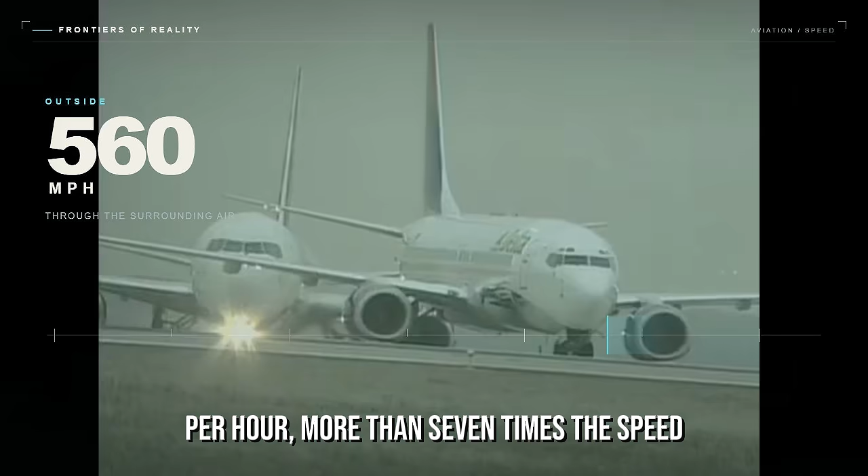But outside that window, the airplane may be crossing the sky at roughly 560 miles per hour, more than 7 times the speed of a car on the interstate. And here is the strange part. Airliners were already flying at nearly this speed more than half a century ago.

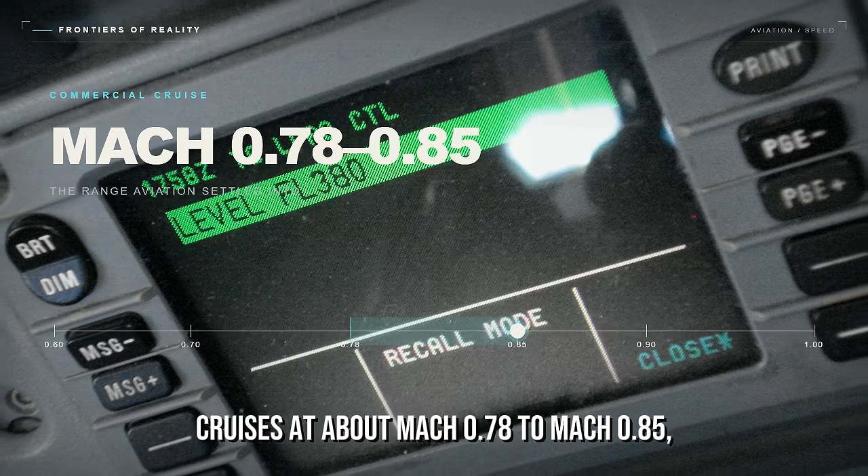Since then, engines have become more powerful. Wings are designed by supercomputers. Modern aircraft are built from advanced alloys and carbon fiber composites. We have sent machines beyond the solar system. Yet a passenger jet built today usually cruises at about Mach 0.78 to Mach 0.85, almost exactly where commercial aviation

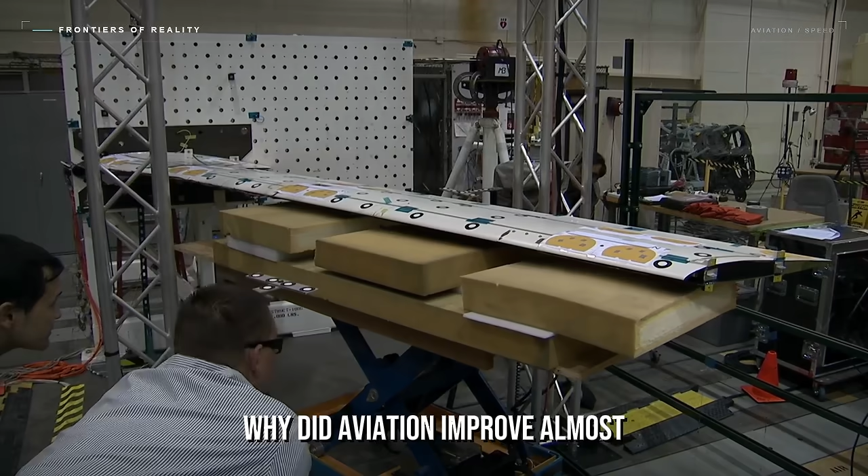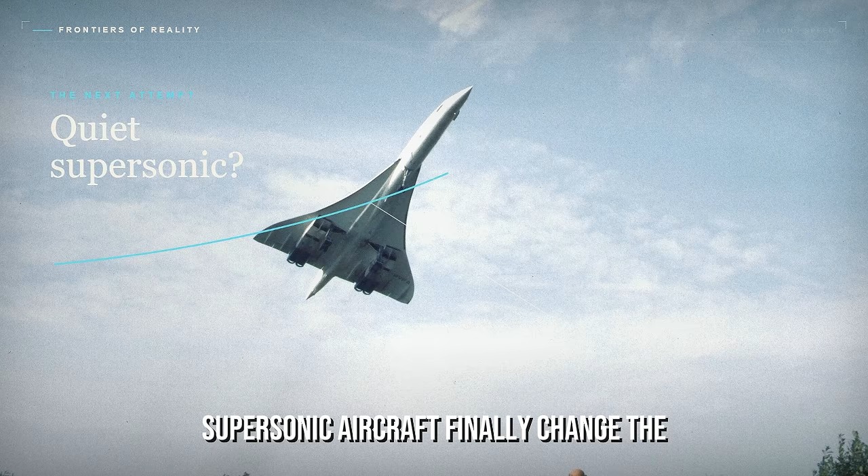settled decades ago. Why? Why did aviation improve almost everything except speed? Why does pushing an airliner only a little faster become so difficult, so expensive, and sometimes so dangerous? And could a new generation of quiet supersonic aircraft finally change the equation? The answer begins with an invisible transformation in the air itself.

At about 35,000 feet, a modern wide-body jet may cruise near Mach 0.85. Depending on temperature, that is roughly 560 to 570 miles per hour through the surrounding air. The number shown on a passenger's flight map may be higher or lower because that display usually shows ground speed, which includes the effect of the wind.

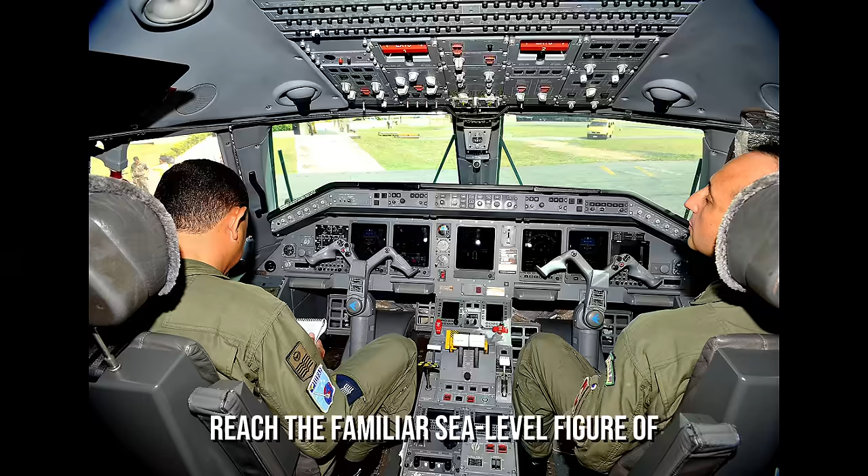For engineers, the more important number is Mach. Mach number compares the airplane's speed with the local speed of sound. And the speed of sound is not fixed. It changes with temperature. In the cold air near cruising altitude, sound travels more slowly than it does near the ground. That means an airliner does not have to reach the familiar sea level figure of roughly 760 miles per hour before parts of its airflow become supersonic.

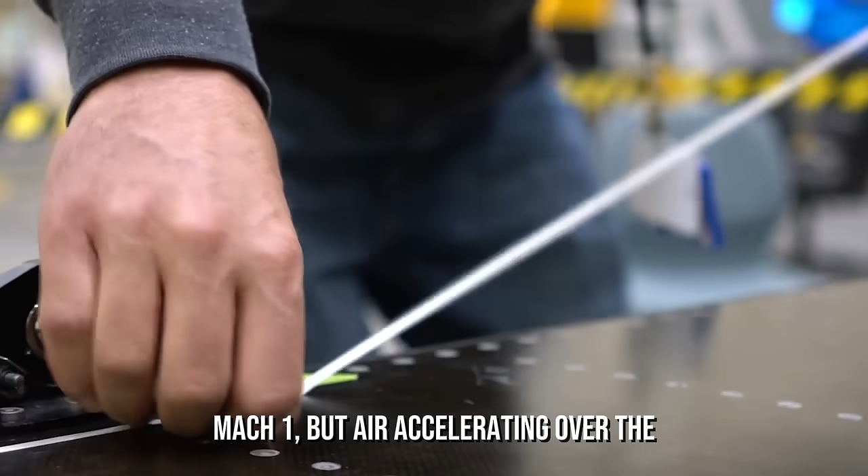The airplane itself may still be below Mach 1, but air accelerating over the curved upper surface of the wing can move faster than the airplane. At normal cruise, small regions of that flow may already reach supersonic speed. A short distance later, the flow has to slow down again. It cannot always do that smoothly.

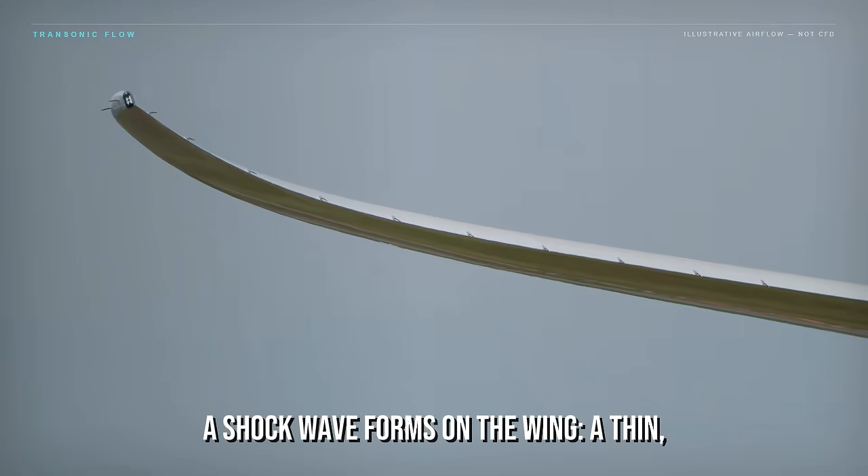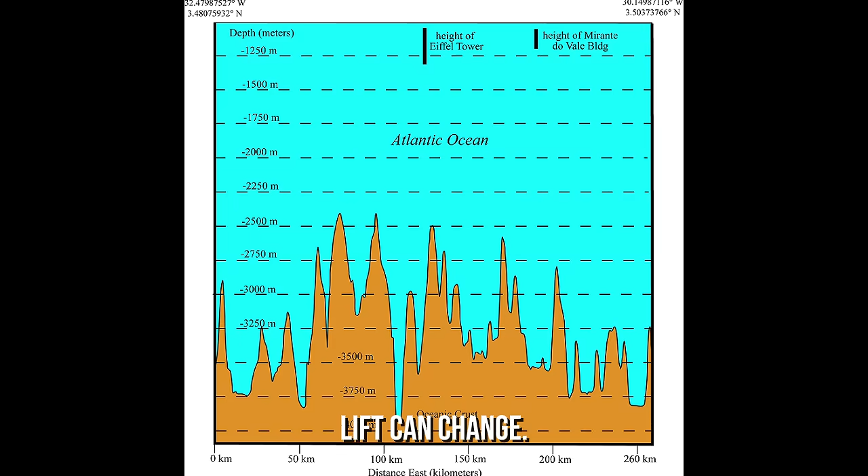A shock wave forms on the wing, a thin, abrupt jump in pressure, density, and temperature. Behind that shock, the airflow may separate from the surface. Drag rises. Lift can change. Buffeting may begin. Control surfaces can become less effective.

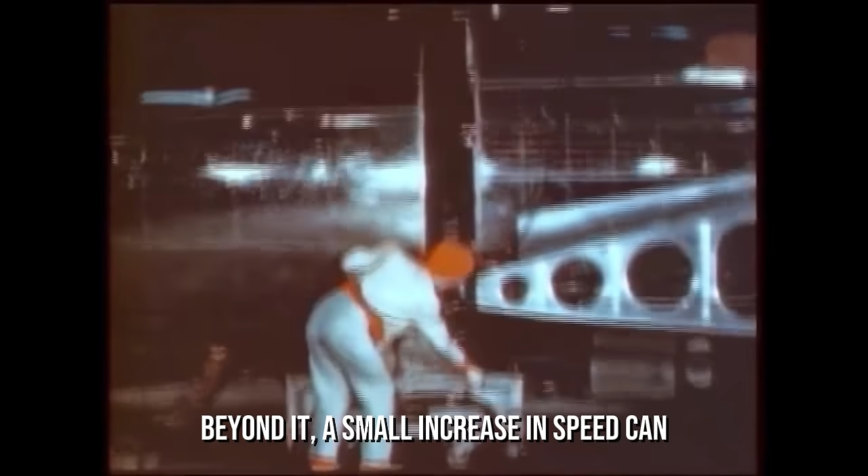This is the transonic regime, the complicated territory around the speed of sound. It is not a solid wall, and an airplane does not slam into it like concrete. But it does create an aerodynamic price that becomes steeper very quickly. Engineers call one important threshold the drag divergence Mach number. Beyond it, a small increase in speed can produce a disproportionate increase in drag.

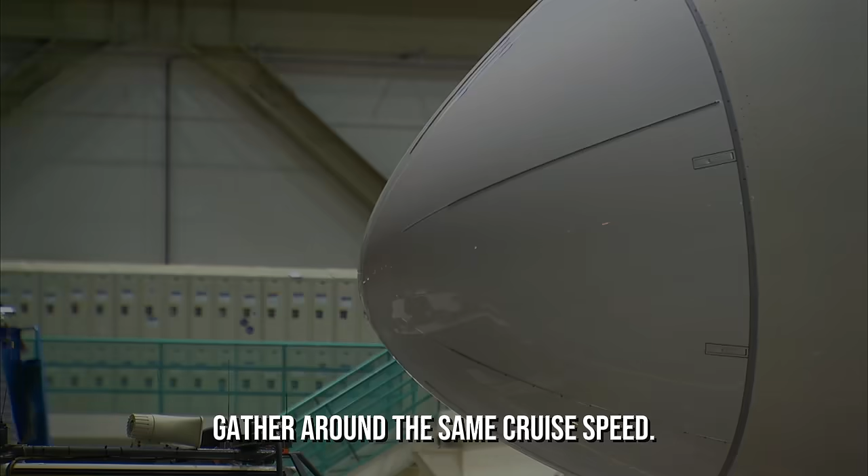To go only a little faster, the engines must deliver substantially more thrust and burn more fuel. This is the first reason passenger jets gather around the same cruise speed. They are designed to fly just below the point where the aerodynamic bill begins climbing sharply.

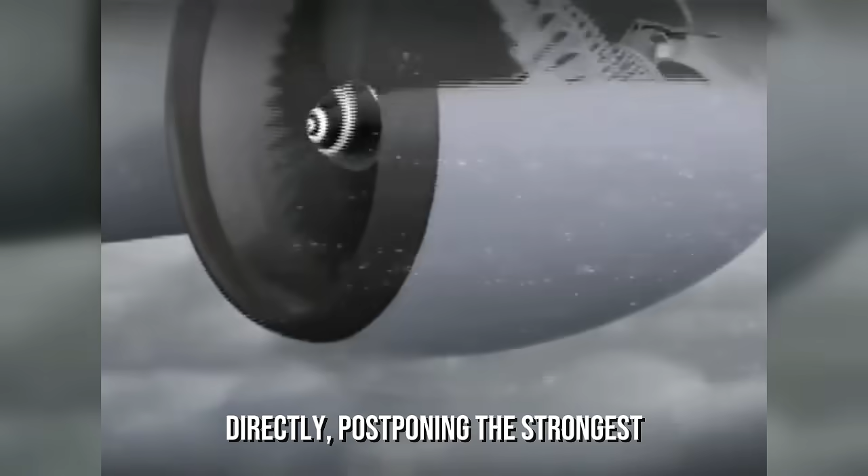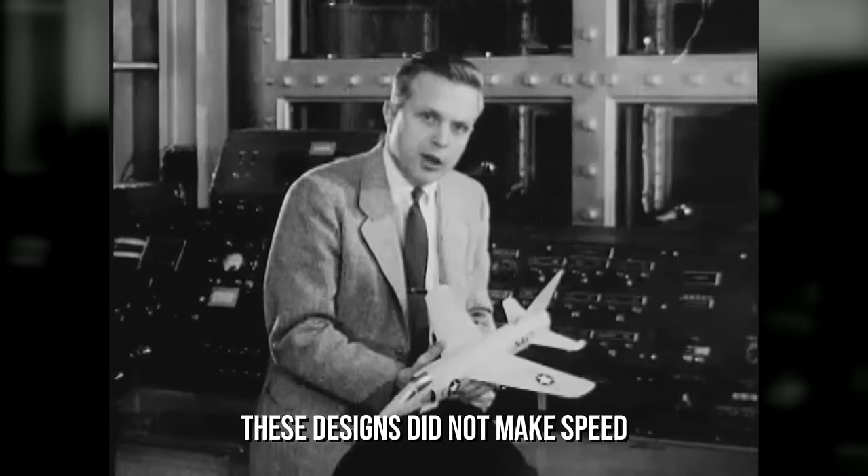Modern wings delay that bill with 2 major ideas. First, they sweep backward. A swept wing reduces the component of airflow that strikes its leading edge directly, postponing the strongest compressibility effects. Second, most modern airliners use supercritical airfoils. Their carefully flattened upper surfaces weaken the shock wave and help the aircraft cruise efficiently near Mach 0.8 or Mach 0.85.

These designs did not make speed irrelevant. They allowed airlines to spend the improvement on efficiency instead. NASA's supercritical wing research showed that manufacturers could either move closer to the sound barrier or remain at familiar speeds and save fuel. The market overwhelmingly chose fuel savings.

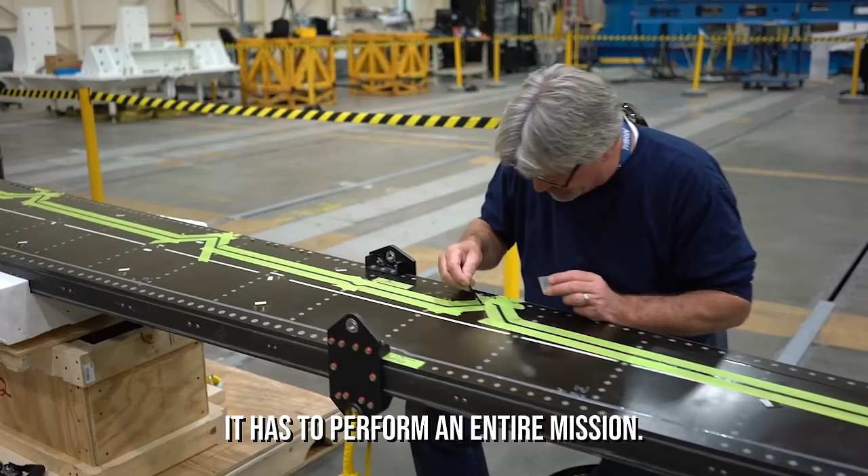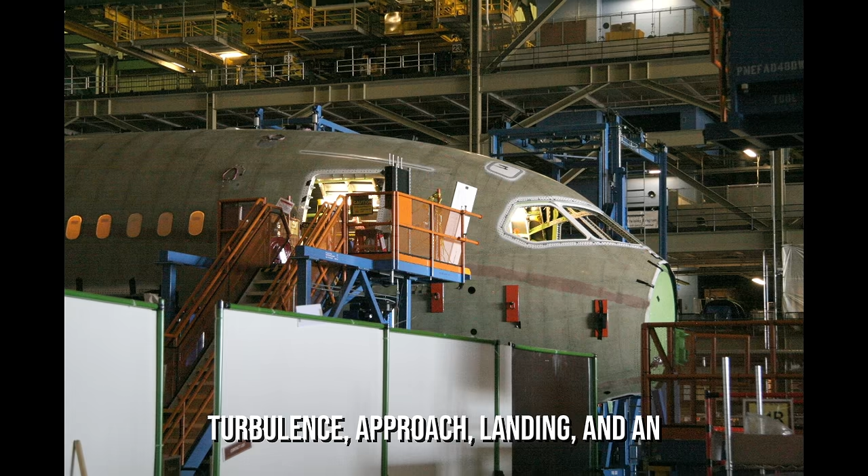That decision reveals something essential about an airliner. It is not designed for one spectacular moment at cruise. It has to perform an entire mission. The same wing that slices efficiently through thin air at 35,000 feet must also lift a fully loaded aircraft from a runway at less than 200 miles per hour. It must remain controllable during turbulence, approach, landing, and an engine failure. It must carry fuel, landing gear, control systems, and sometimes hundreds of passengers.

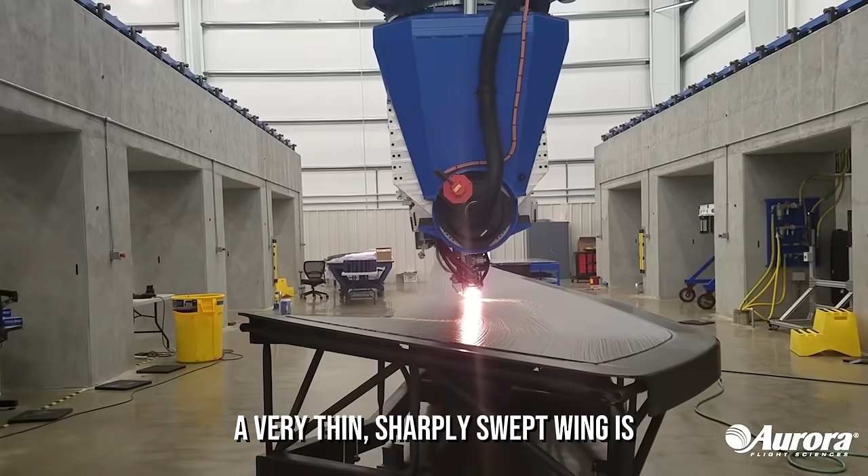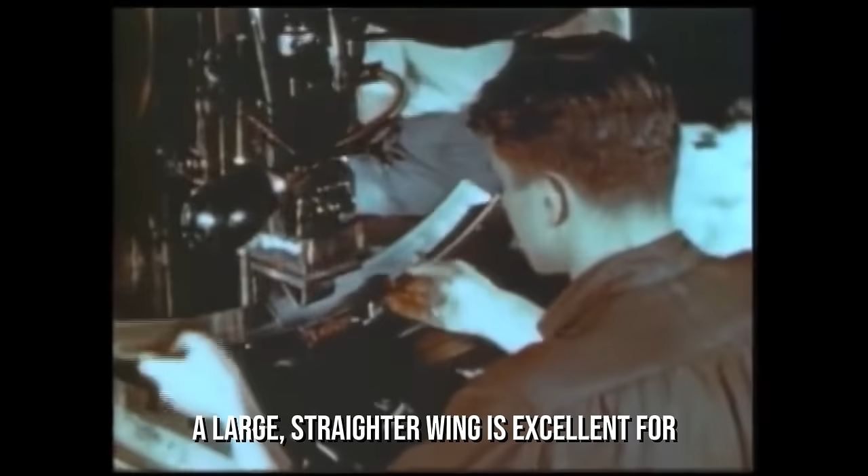A very thin, sharply swept wing is excellent for high speed, but it provides less room for fuel, creates structural challenges, and performs poorly at low speed unless engineers add more weight and complexity. A large, straighter wing is excellent for takeoff and landing, but it produces too much drag near the sound barrier. Every airliner is therefore a negotiated settlement between incompatible demands. Speed is only one vote.

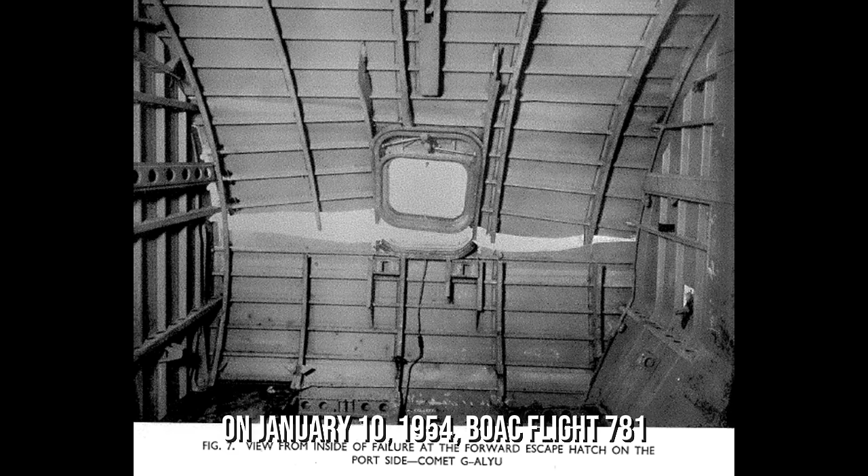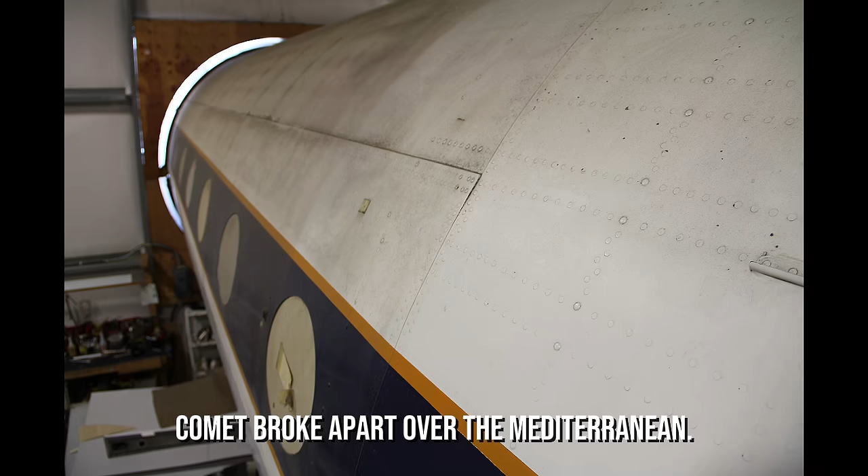The hidden cost of that settlement became visible during the first years of the jet age. On January 10, 1954, BOAC Flight 781 departed Rome for London. The aircraft was a de Havilland Comet, the world's first commercial jetliner. It flew higher, faster, and more quietly than the piston-powered aircraft it was replacing. About 20 minutes after takeoff, the Comet broke apart over the Mediterranean. All 35 people aboard were killed.

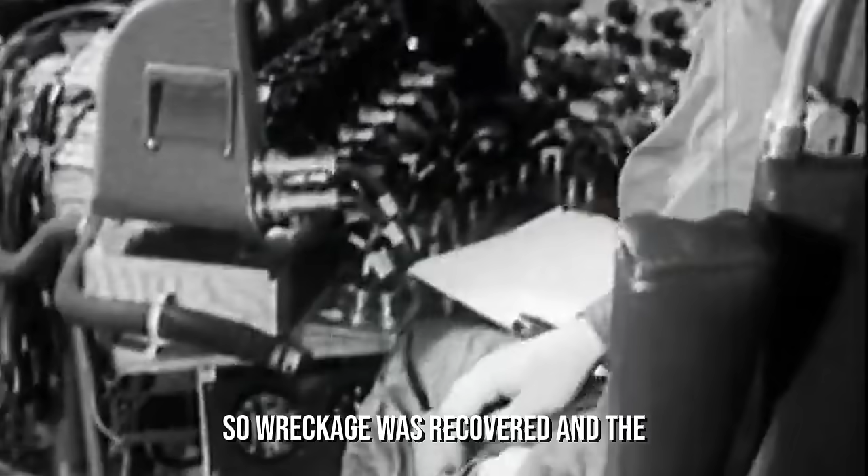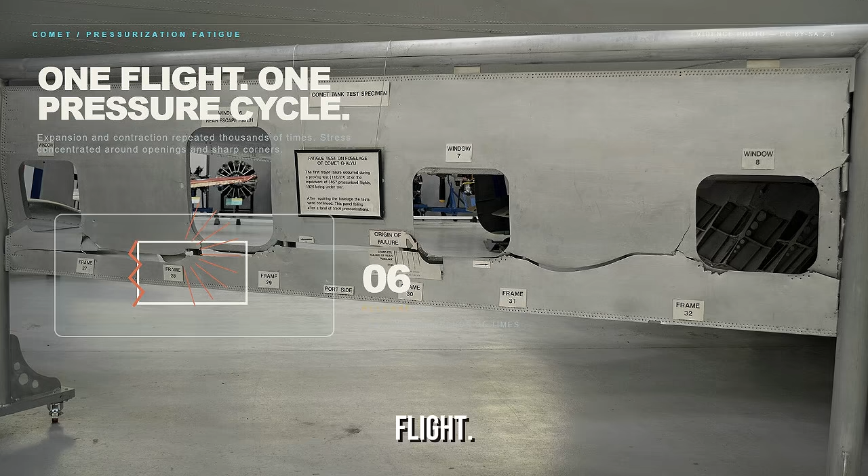Investigators faced a mystery. There was no intact aircraft to examine, so wreckage was recovered and the fuselage was reconstructed. Another Comet airframe was placed inside a huge water tank. By repeatedly pressurizing and depressurizing it, investigators recreated the stress of flight after flight. The result changed aircraft design.

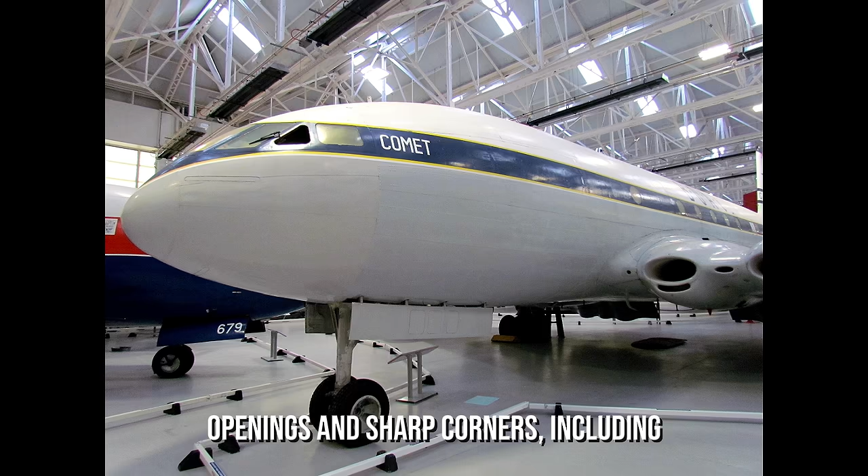The Comet's pressurized cabin expanded slightly at altitude and contracted again after landing. Repeating that cycle thousands of times produced metal fatigue. Stress became concentrated around openings and sharp corners, including window and antenna cutouts. Tiny cracks grew until the structure failed explosively.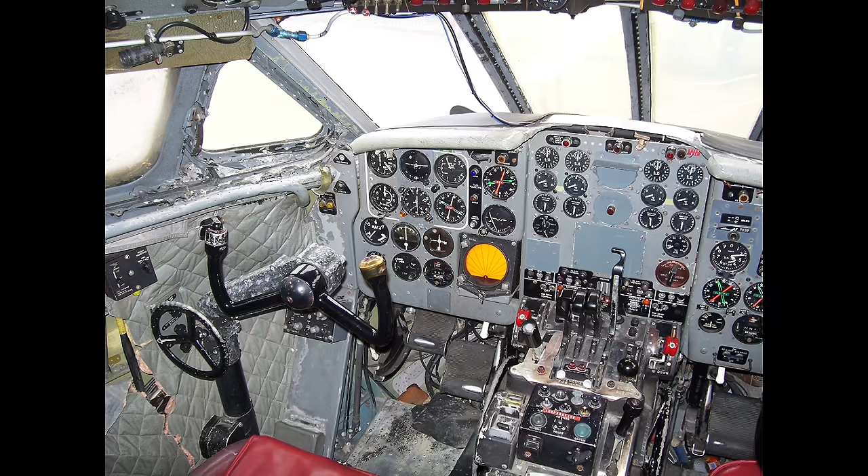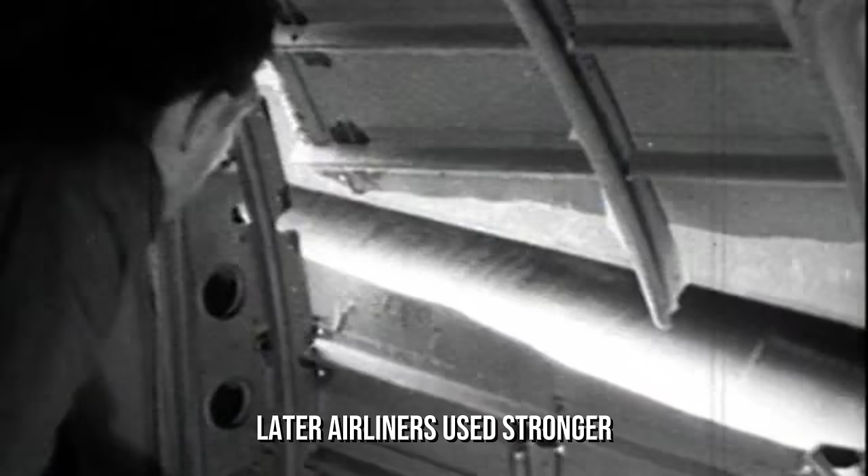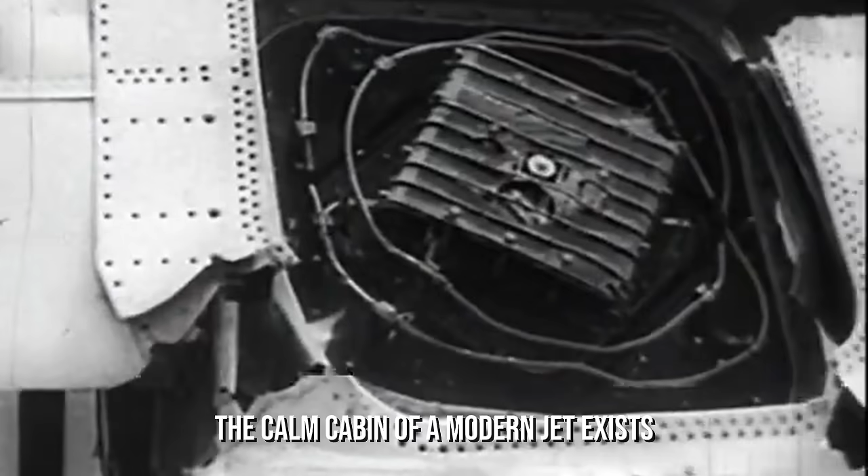The lesson was not that 35,000 feet, or 560 miles per hour, created a universal speed limit. The lesson was that high-altitude jet travel places repeated loads on a structure that can appear perfectly healthy until it suddenly is not. Later airliners used stronger construction, improved inspection methods, and openings with more rounded corners that distribute stress more smoothly. The calm cabin of a modern jet exists because engineers learned to control pressure cycles that passengers never feel.

But the higher an airplane climbs, the more another invisible margin begins to shrink. Thin air reduces drag, which is good for efficiency. It also reduces the lift available at any given true airspeed. To remain airborne, the airplane must move fast enough through that thin air. Fly too slowly, and the wing can stall.

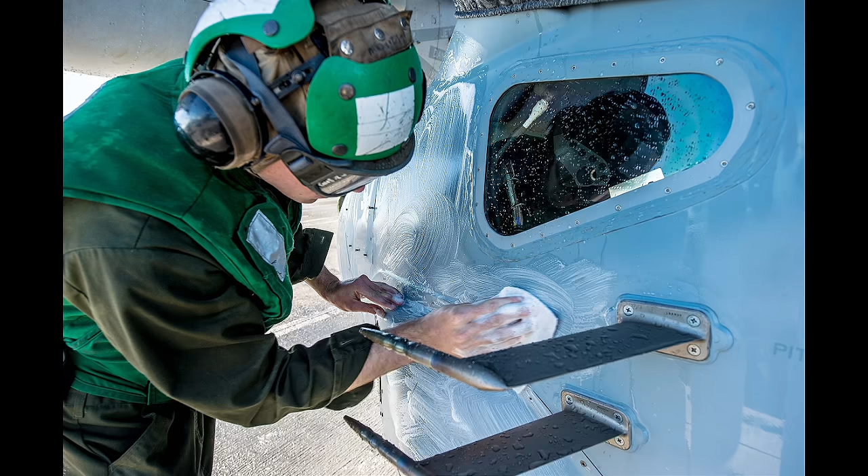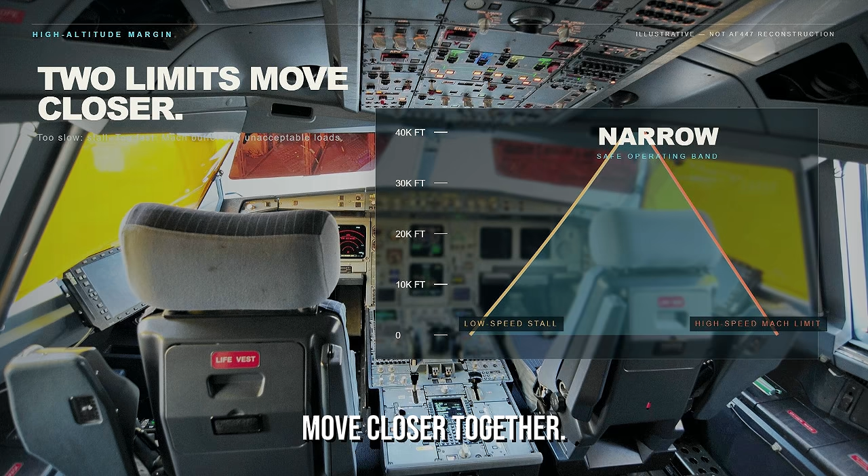At the same time, the aircraft must remain below its high-speed Mach limit, where shockwaves, buffet, or structural loads become unacceptable. At very high altitude, the low-speed boundary and the high-speed boundary can move closer together. Pilots historically called the extreme version of this narrowing coffin corner. Modern transport aircraft use carefully calculated flight envelopes, automatic warnings, and control laws to keep operations safely away from those boundaries.

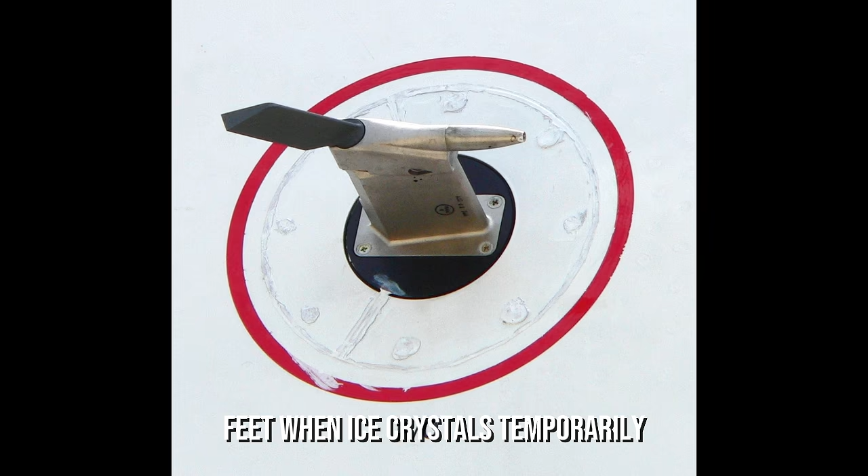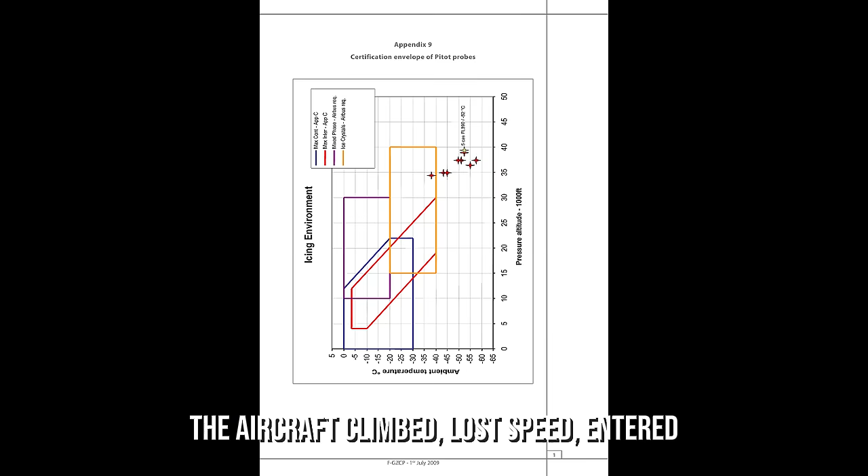One famous accident is often described incorrectly in this context. On June 1, 2009, Air France Flight 447 was cruising over the Atlantic at 35,000 feet when ice crystals temporarily obstructed its pitot probes. The flight computers lost reliable airspeed information, the autopilot disconnected, and control logic changed. In the confusion, the pilots made sustained nose-up inputs. The aircraft climbed, lost speed, entered an aerodynamic stall, and remained stalled until it struck the ocean. All 228 people aboard were killed.

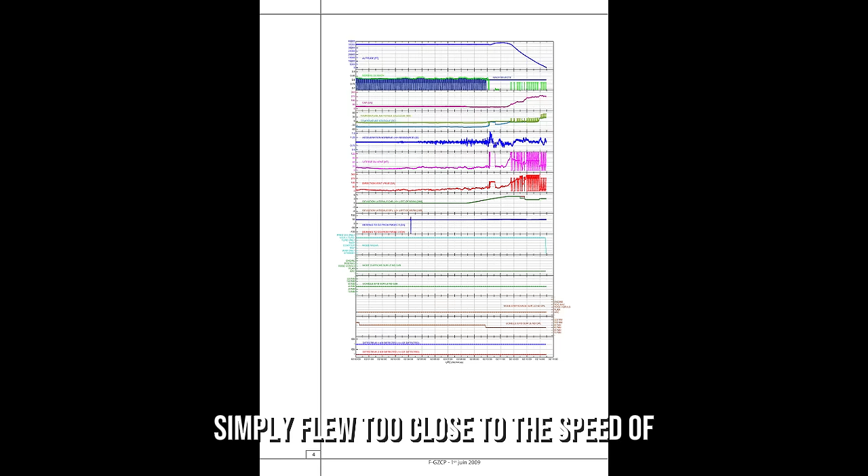Flight 447 did not crash because it simply flew too close to the speed of sound, and it was not a textbook case of an airplane being trapped between stall and overspeed. The official investigation described a chain involving unreliable airspeed, automation changes, control inputs, warning interpretation, training, and the crew's failure to recognize the sustained stall.

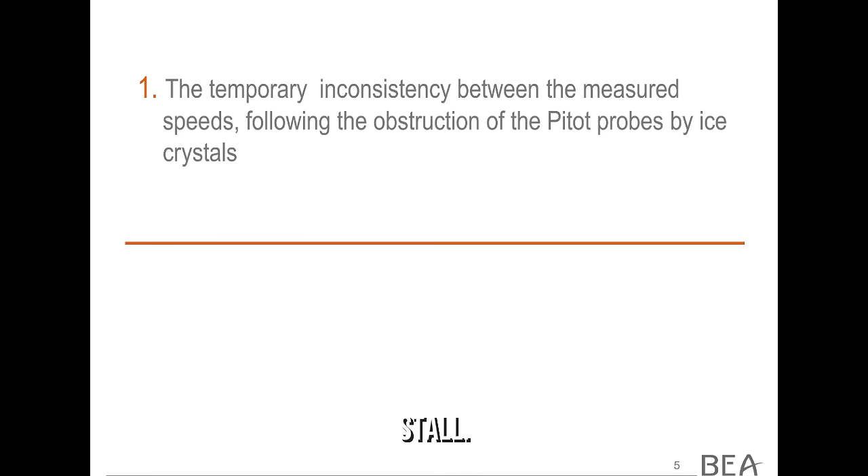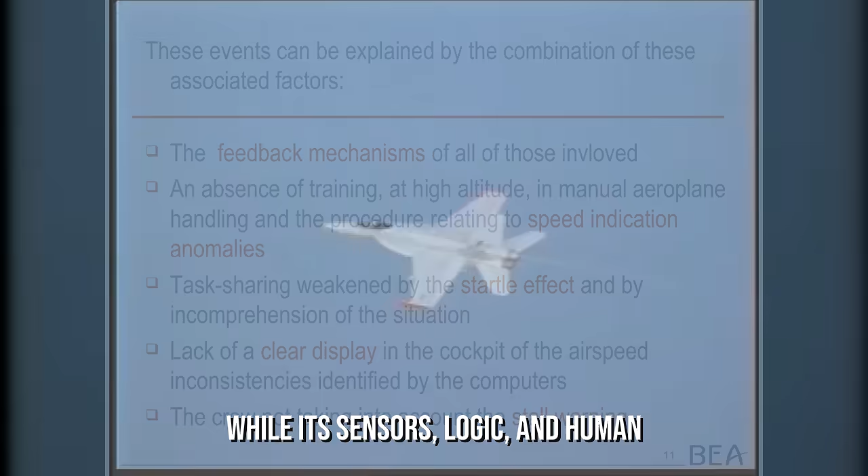Its real lesson is more important than the myth. At cruise altitude, speed information and energy management matter enormously. Automation can protect an aircraft only while its sensors, logic, and human operators understand the same situation. Physics never leaves the cockpit.

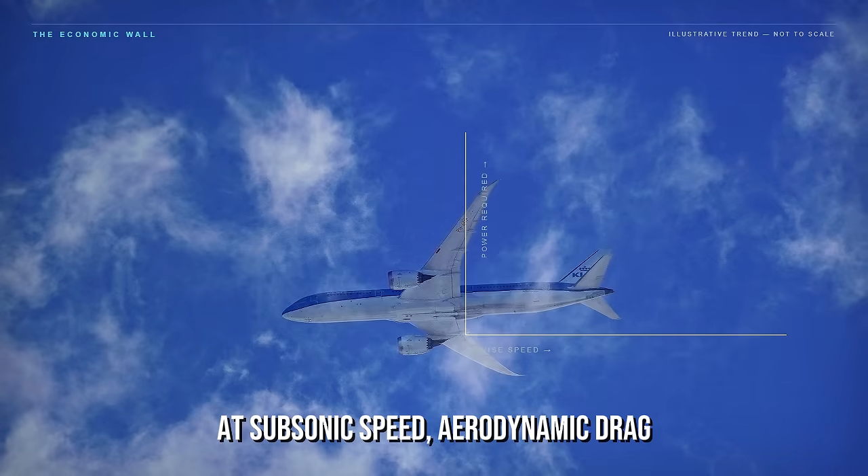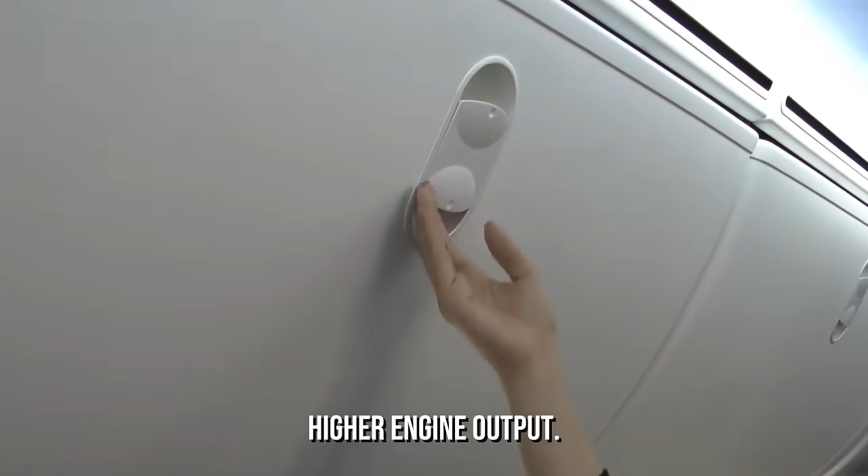Even when every safety margin is respected, flying faster creates a brutal economic problem. At subsonic speed, aerodynamic drag already grows rapidly as velocity increases. Near the transonic boundary, wave drag joins the equation. More thrust requires larger engines or higher engine output. More output requires more fuel. More fuel adds weight. More weight demands more lift, which creates still more drag. This feedback loop can turn a modest improvement in travel time into a major increase in operating cost.

In 2001, Boeing revealed the Sonic Cruiser, a radical airliner concept designed to fly as fast as Mach 0.98. It promised to cut long-distance flight times by roughly 15 to 20% without crossing into sustained supersonic flight.

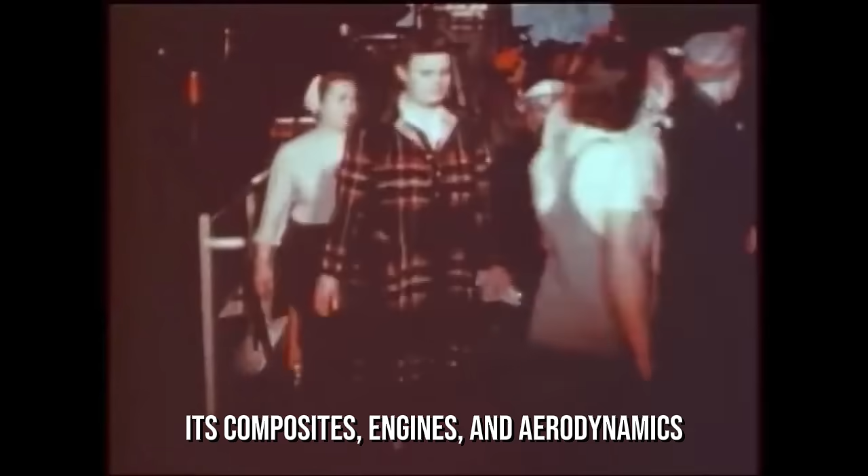On paper, it looked like the next step after the conventional jet. But airlines were being asked to choose between two different kinds of progress: arrive somewhat sooner or use dramatically less fuel. They chose efficiency. Boeing ended the Sonic Cruiser program and redirected key technologies toward what became the 787 Dreamliner. The 787 cruises closer to Mach 0.85, but its composites, engines, and aerodynamics reduce fuel consumption compared with the aircraft it replaced. The reason is visible in any real trip.

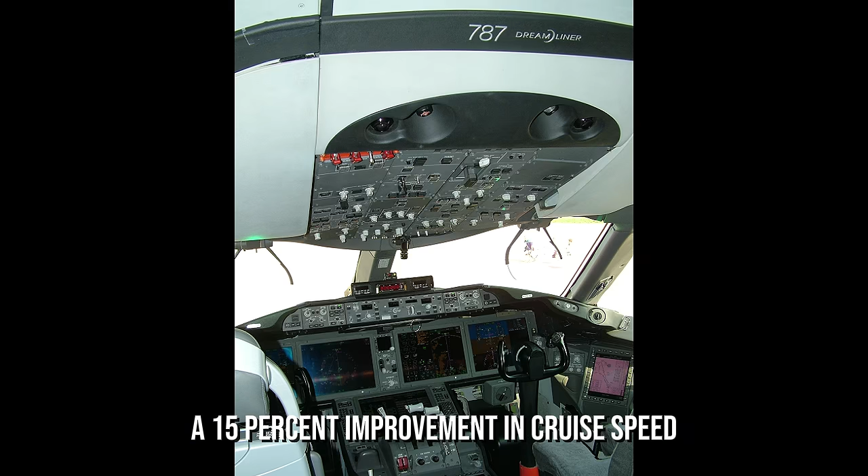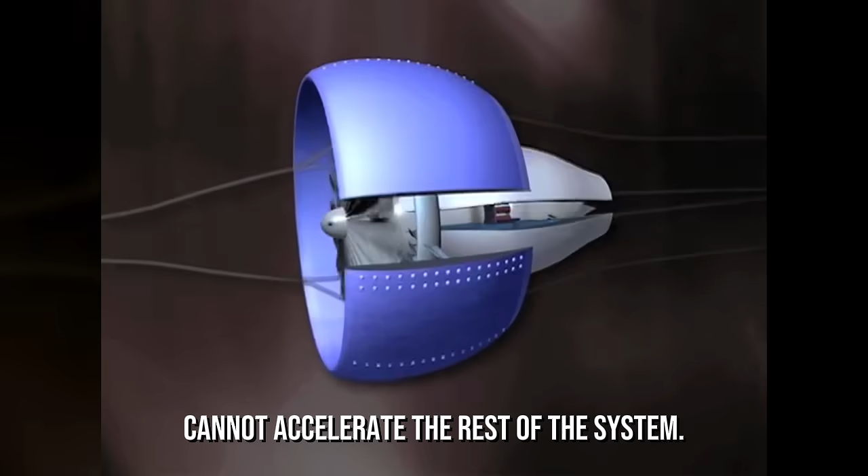A 15% improvement in cruise speed does not make the entire journey 15% shorter. Passengers still travel to the airport, pass through security, wait at the gate, taxi, climb, descend, collect baggage, and reach their final destination. A faster airplane can save meaningful time on a long ocean crossing, but it cannot accelerate the rest of the system. For most travelers and airlines, a lower fare is worth more than an hour saved.

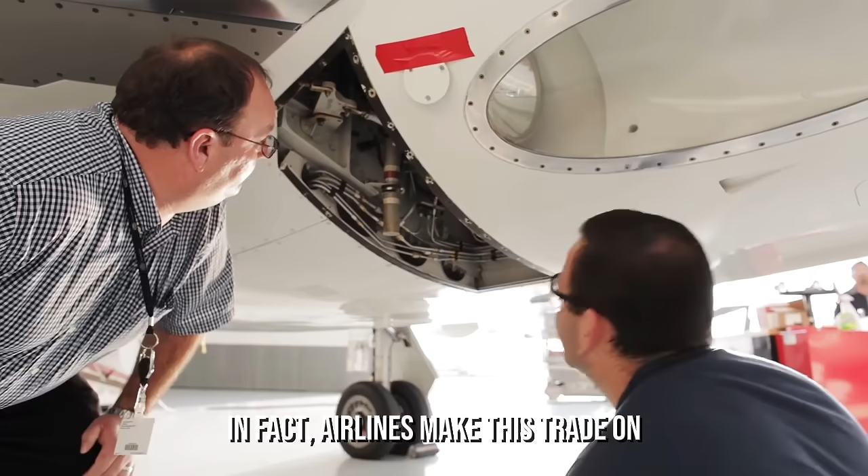In fact, airlines make this trade on nearly every flight through a value called cost index. The flight management computer can be told how heavily the airline values time compared with fuel. A low cost index favors slower, more economical flight. A higher cost index tells the aircraft to accept greater fuel burn in exchange for arriving sooner.

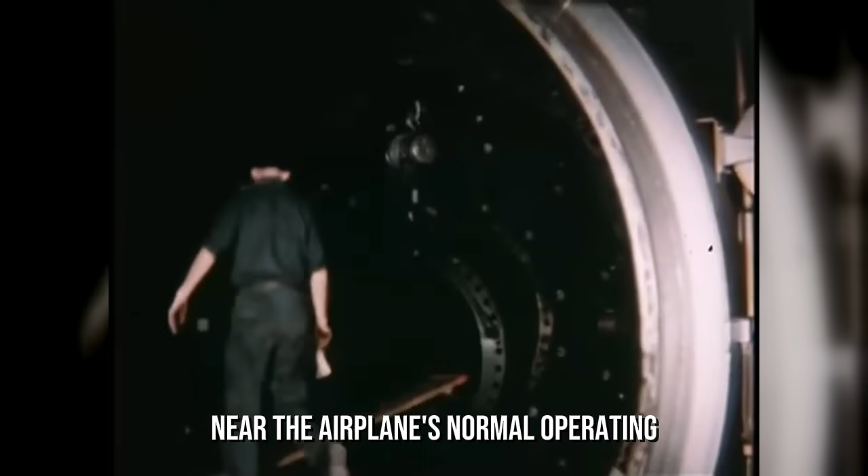If a flight is running late, the crew may be able to increase cruise speed within the approved envelope, but the result is rarely dramatic. Near the airplane's normal operating point, burning noticeably more fuel may recover only a few minutes. A strong tailwind can change the arrival time far more than pushing the throttles forward.

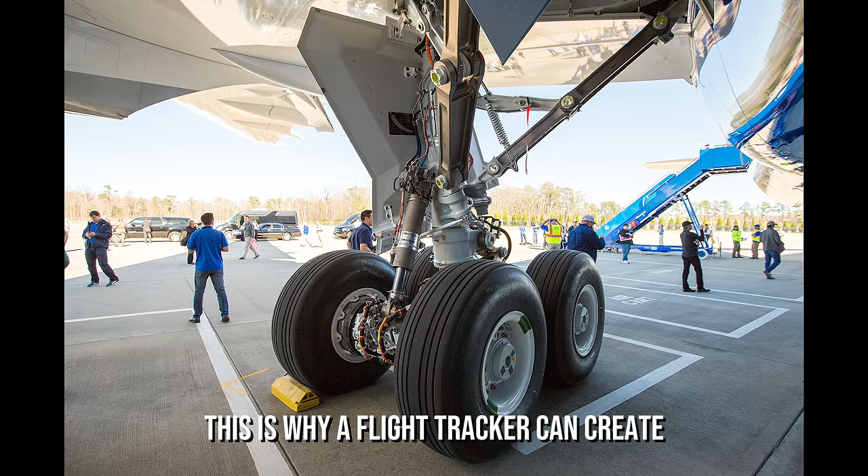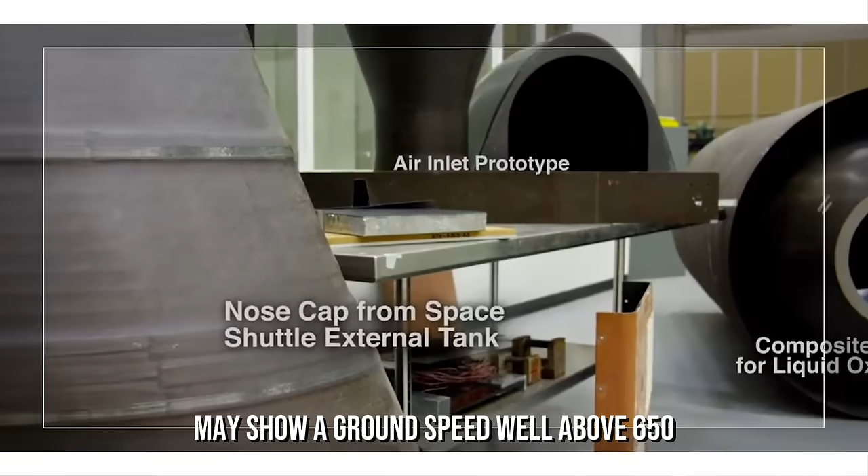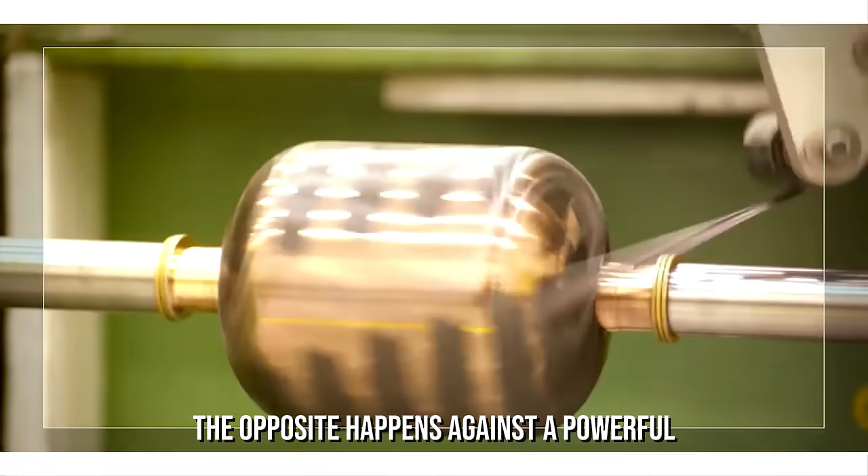This is why a flight tracker can create the illusion that one airliner is much faster than another. An eastbound jet crossing the Atlantic may show a ground speed well above 650 miles per hour, while remaining at an ordinary Mach number. The airplane is not breaking its aerodynamic limits. It is riding inside a river of fast-moving air. The opposite happens against a powerful headwind. Ground speed falls even though the wings experience the same safe airflow.

For the aircraft, the atmosphere is the reference. For the passenger watching the map, the Earth is the reference. Mixing those two speeds makes the supposed 590 mile per hour limit look much more precise than it really is. There is no single speed selected by law or hardware. There is a small operating neighborhood where the aircraft performs best, and the exact point moves with altitude, temperature, weight, wind, schedule, and fuel price.

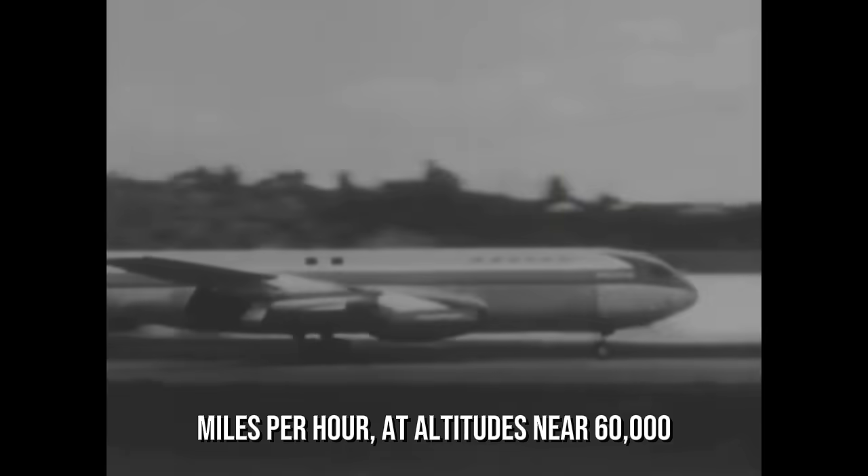There was, however, an aircraft that refused this compromise. Concorde entered service in 1976 and cruised at about Mach 2, roughly 1,350 miles per hour, at altitudes near 60,000 feet. It could cross the Atlantic in less than half the time required by a conventional airliner. Concorde proved that supersonic passenger travel was possible. It also demonstrated why possibility and practicality are not the same thing.

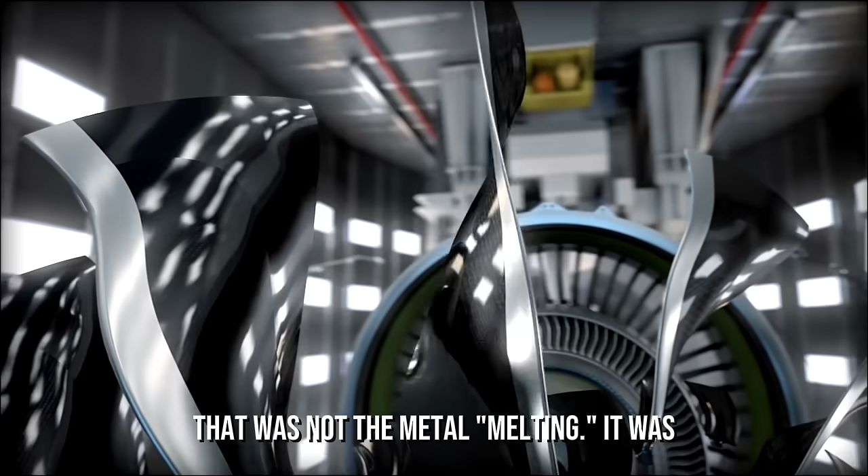At twice the speed of sound, compressing and disturbing the air heated the aircraft's skin. Near the nose, temperatures could approach 260 degrees Fahrenheit. Concorde was designed to tolerate the effect, but its aluminium structure still expanded by roughly 7 inches during supersonic cruise and contracted again after landing. That was not the metal melting. It was controlled thermal expansion, anticipated by engineers and accommodated with special joints, materials, paint, insulation, and maintenance procedures.

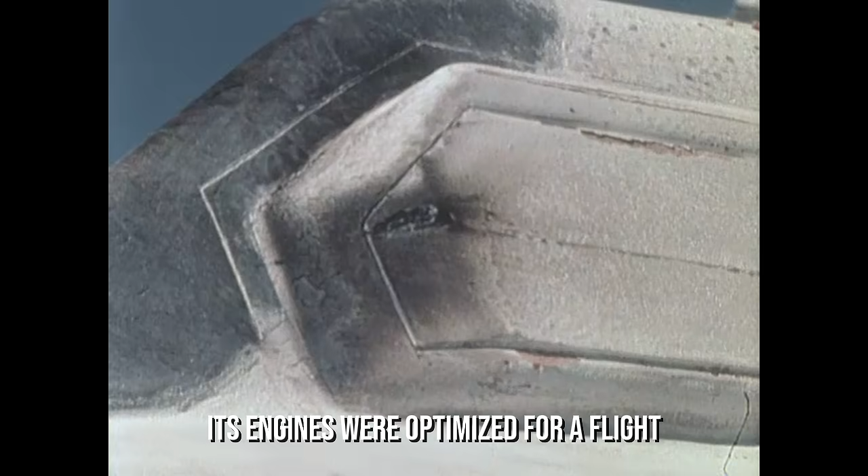The larger problem was everything required to make that performance routine. Concorde carried about 100 passengers. It consumed enormous amounts of fuel. Its engines were optimized for a flight regime completely different from that of a conventional airliner. Its maintenance was specialized, its ticket prices were high, and the shape that made it efficient at Mach 2 made it less efficient at ordinary subsonic speeds.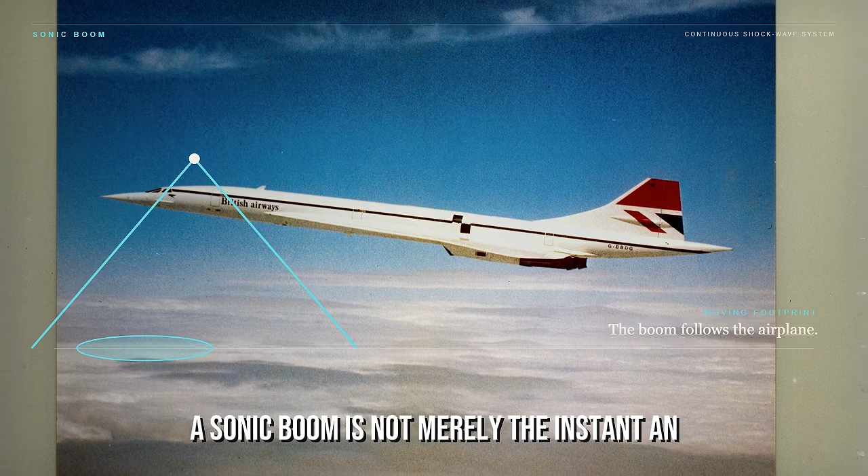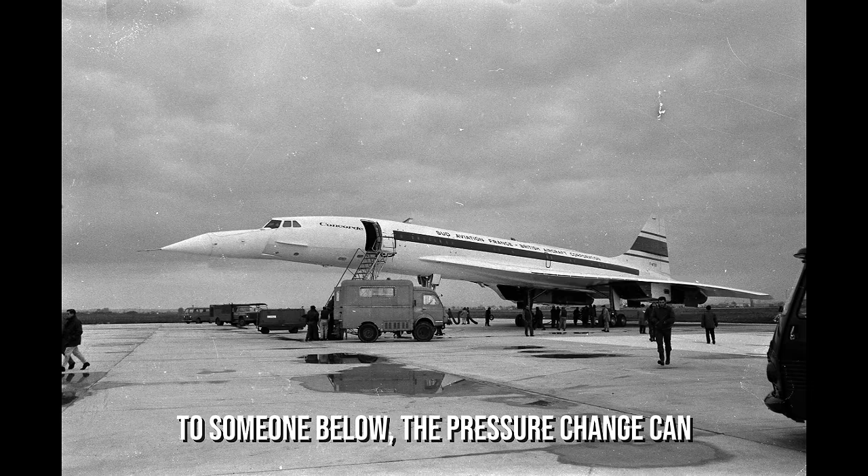Then there was the boom. A sonic boom is not merely the instant an aircraft breaks the sound barrier. A supersonic airplane continuously generates a system of shock waves. As it travels, those waves sweep across the ground in a long corridor beneath the flight path. To someone below, the pressure change can sound like a sudden double explosion.

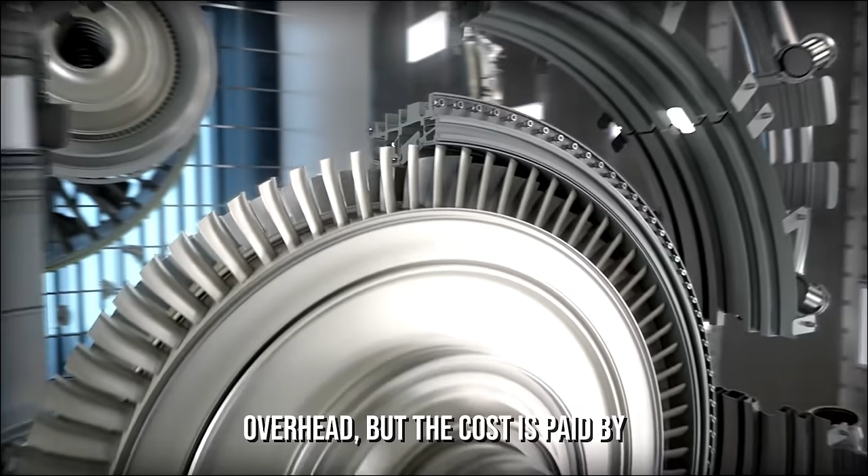Traditional supersonic aircraft can rattle windows and startle entire communities. The faster flight may be happening miles overhead, but the cost is paid by everyone underneath it. In 1973, the United States adopted rules that generally prohibited civil flight above Mach 1 over land unless specially authorized.

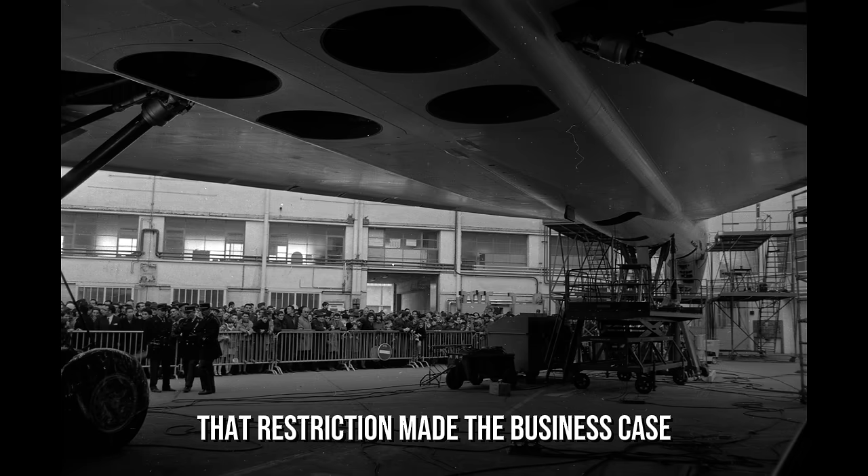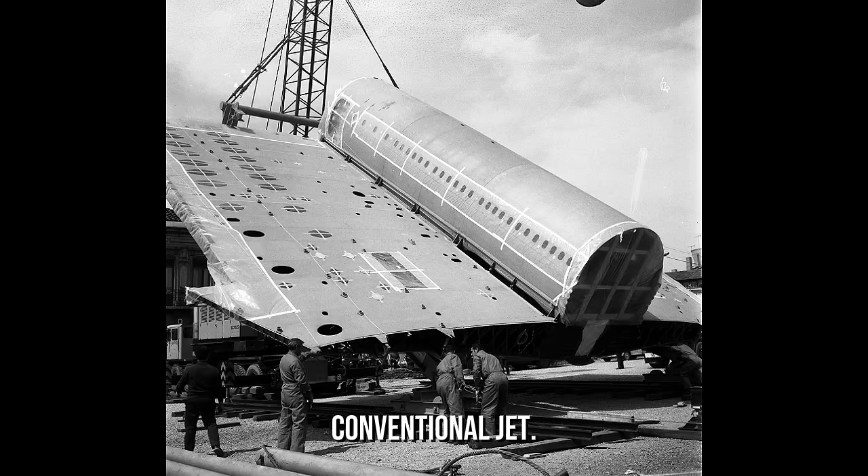That restriction made the business case for a supersonic airliner much harder. A plane designed for Mach 2 could use its defining advantage mainly over oceans. On many routes, it would have to slow down and behave like a far less efficient conventional jet. This is why modern airlines did not simply build another Concorde after it retired.

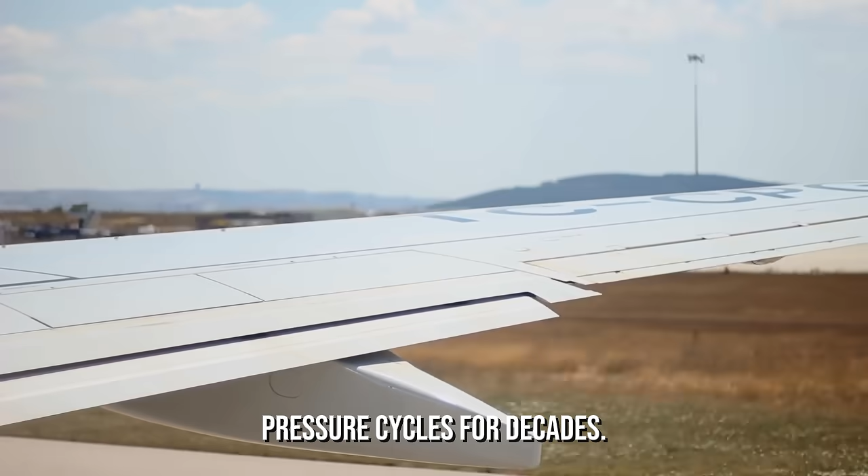To succeed, a new supersonic aircraft must solve several problems at once. It has to reduce the boom that reaches the ground. It must meet modern airport noise standards during takeoff and landing. It must use much less fuel. Its engines must work efficiently at both subsonic and supersonic speeds. Its structure must survive heat and pressure cycles for decades. And the ticket must be affordable enough to fill the seats. Solving only the speed problem is not enough.

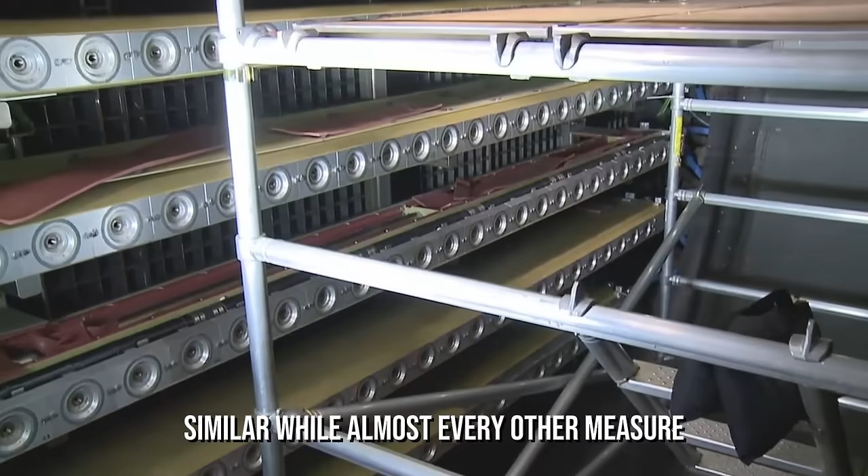That brings us to the most important question. If conventional airliners have remained near Mach 0.85 for decades, does that mean aviation stopped advancing? No. The speed displayed to passengers stayed similar while almost every other measure improved. Jet engines became dramatically more efficient and quieter. Navigation became more precise. Composite structures reduced weight.

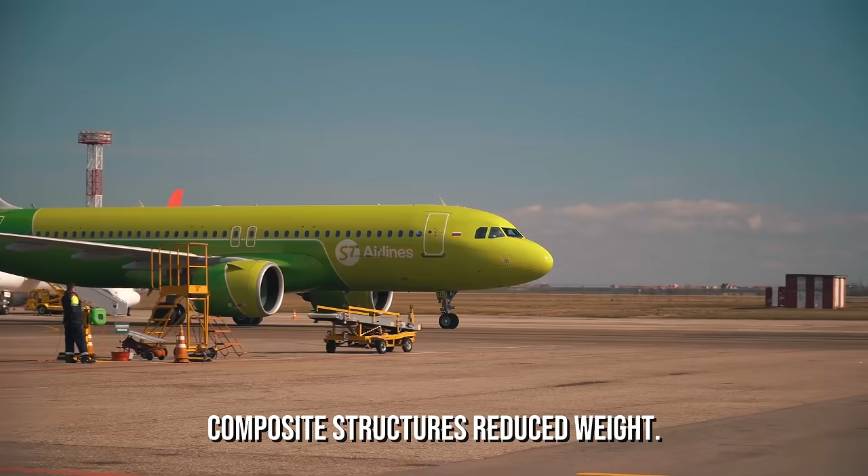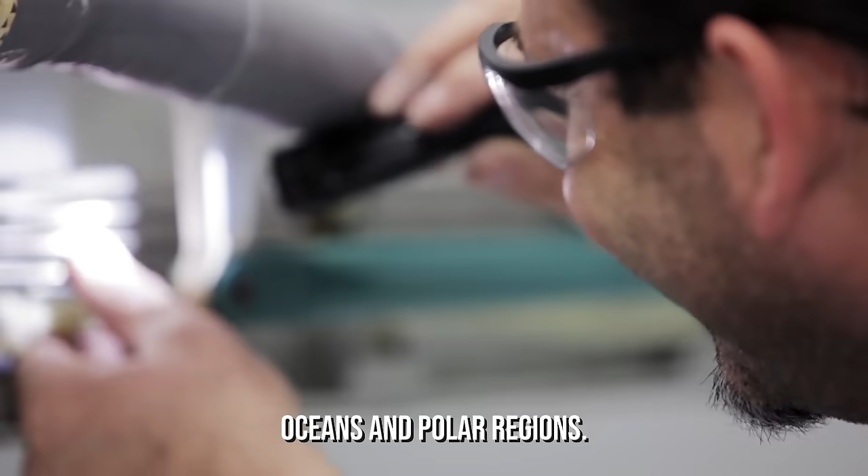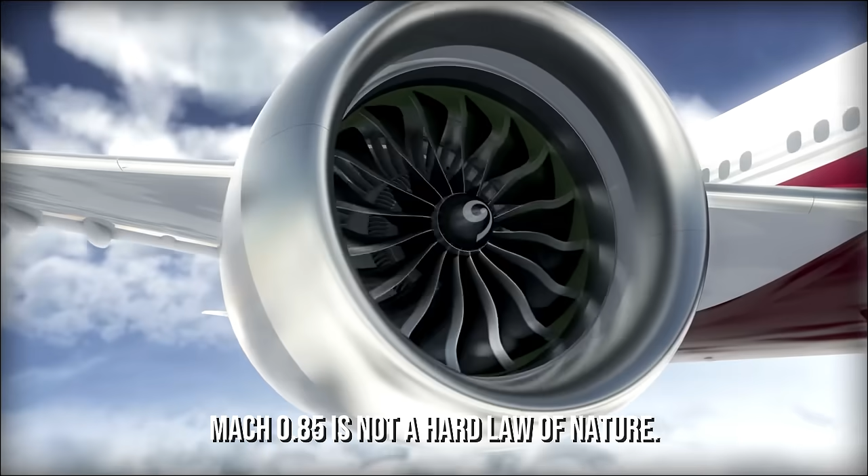Weather forecasting improved. Long-range twin-engine aircraft replaced many 3- and 4-engine jets. Reliability increased so much that 2-engine airliners routinely cross oceans and polar regions. The industry did not fail to make aircraft faster. It deliberately invested in carrying more people, farther, more safely, with less fuel and less noise. Mach 0.85 is not a hard law of nature. It is the center of an enormous optimization problem. And now that optimization may be changing.

On June 6, 2025, a United States executive order directed the Federal Aviation Administration to move away from the blanket prohibition on civil supersonic flight over land and towards standards based on the noise that actually reaches the ground. That distinction matters. It does not mean that every supersonic aircraft can suddenly race over American cities. As of 2026, the regulatory system is still being rewritten, and civil supersonic operations over land remain subject to federal restrictions and authorization. The goal is to replace a simple speed limit with a measurable noise limit.

At the same time, NASA is testing the technology that could make such a rule possible. The X-59 is an experimental aircraft built for NASA's Quesst mission. Its long, needle-like nose and carefully shaped body are designed to prevent shock waves from merging into the powerful pattern produced by a conventional supersonic aircraft. Instead of a window-rattling boom, the objective is a much quieter thump. The X-59 is not a passenger airliner prototype. It is a research aircraft built to collect the evidence regulators need.

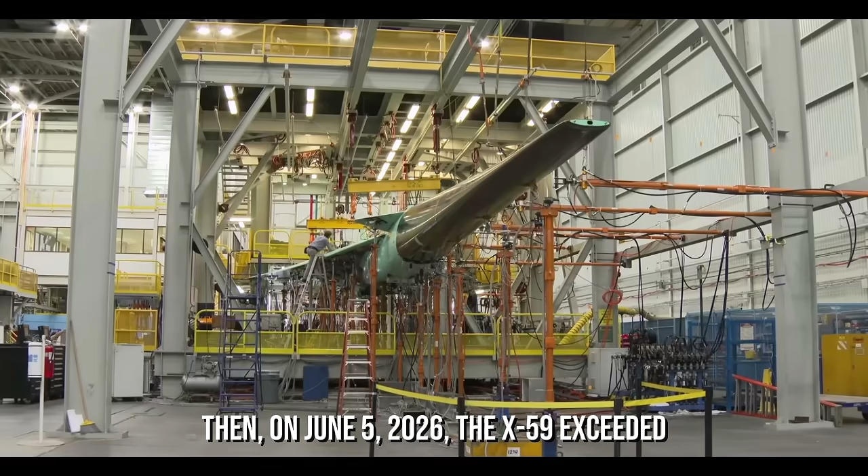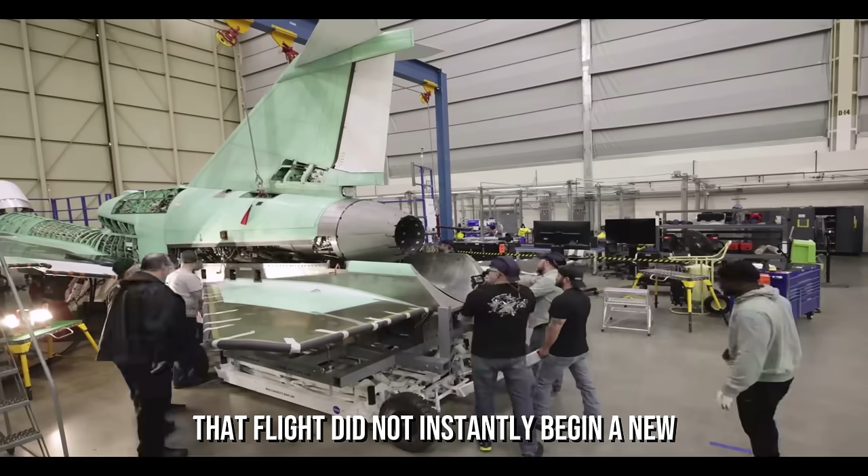In October 2025, it made its first flight. Then, on June 5, 2026, the X-59 exceeded the speed of sound for the first time, reaching about Mach 1.08, roughly 713 miles per hour at 43,400 feet. That flight did not instantly begin a new age of supersonic travel, but it crossed an important threshold. For the first time in decades, American technology and regulation are moving together toward the same question. Not whether an aircraft is supersonic, but whether people on the ground can live with the sound it creates.

Future high-speed airliners may therefore compete in two races at once. One race will be measured in miles per hour. The other will be measured in decibels, fuel burnt, maintenance hours, and dollars per seat. The winner will not necessarily be the fastest aircraft engineers can build. It will be the fastest aircraft that airlines can operate, passengers can afford, regulators can approve, and communities below may barely hear. That is why your next flight will probably still cruise near 560 miles per hour.

The airplane is not struggling against an arbitrary limit. It is balancing on a narrow point where aerodynamics, safety, cost, noise, and human convenience all agree. For more than 50 years, that balance favored efficiency over speed. Now, for the first time in a generation, the balance may be moving again.